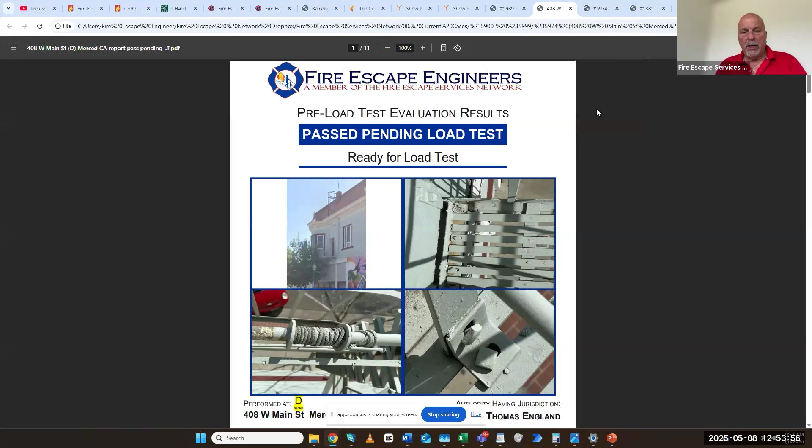So let's talk about, and let's look at a typical inspection report. Let's look at the one we did for you down there. Remember we got there, and we looked at, and this is a report to the client, not to you. You just got a document that said, hey, passed, failed, ready for load test. So the client gets this.

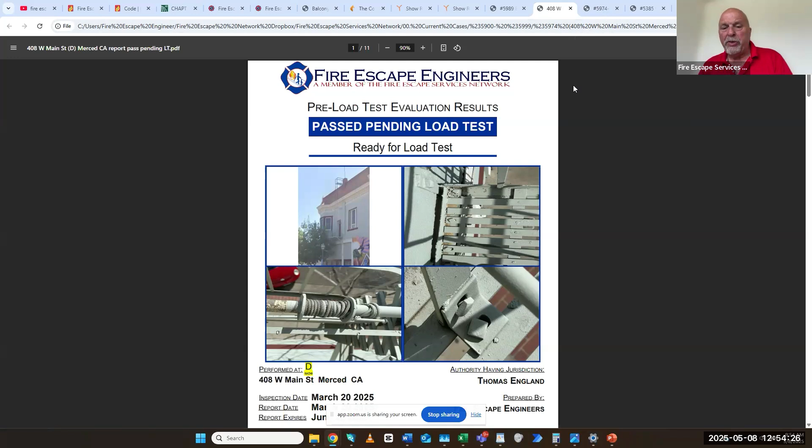This is a second document, you know, that the... it's the, what do you call it? It's not the repair report. This tells you what the problems are, not where they are and how you're going to fix it. Just saying. Okay, so let's talk about, in general, to the client, not to you, what he got to see.

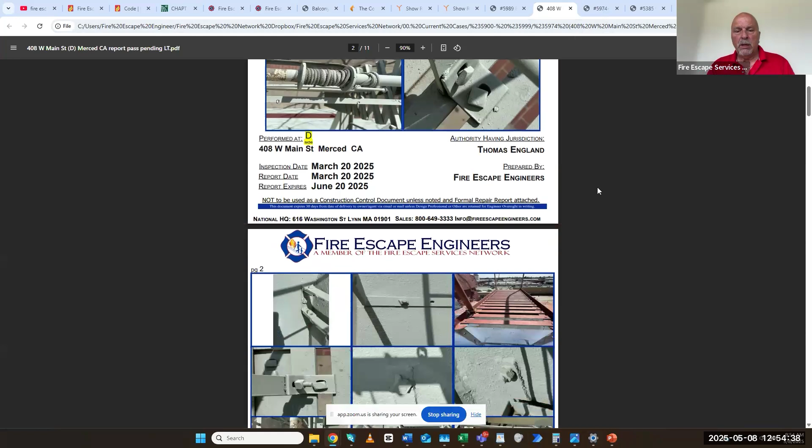So scroll down a little bit more. Some pictures of some of our concerns. You don't get to see this. You don't got time, unless you ask for this, do you understand? If you ask for this, you get this too.

Got it? We have some percentage failures, the paint failed in this percentage, the stringers failed. We have this questionnaire here, so we asked those 25 questions. See them here? Or is this the 15? This is a 15 since this system had residential, right? So residentials get a shorter version because they don't care. They don't want to read 25 steps, they just want to know some of the things.

So we talk about everything here. Paint, we talk about paint. We talk about structural. And then at the end, we talk about code. And a lot of times down at the very bottom, the code thing we talk about is lights are missing, or there's a power line coming to your fire escape and it's not protected.

For short, we tell the client, hey, here's some of the general problems on your fire escape. This is not a repair report. Okay. All right, so then it covers the three things: in general, these things failed, you need to get this looked at, you need to hire us now for the next phase, and that is to create an action plan off of all these reports and videos that we've done.

So, and at the very bottom, here's the only document you're going to get. It's just this document. It says it passed, failed, life safeties are available to you or not. At any time, you can ask for a report. Now, here comes the action plan.

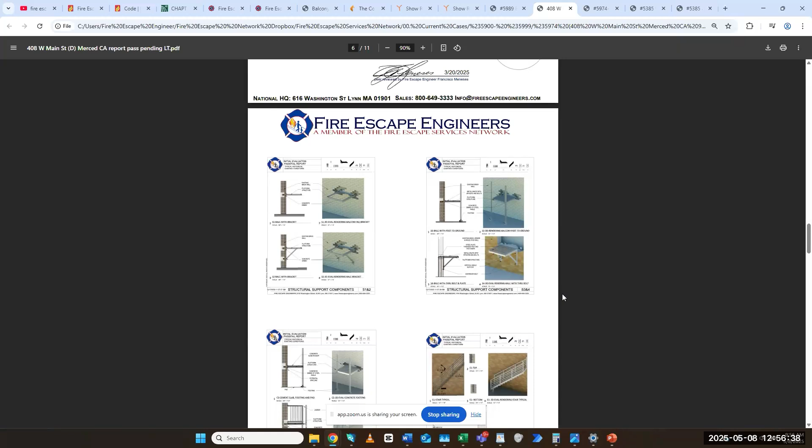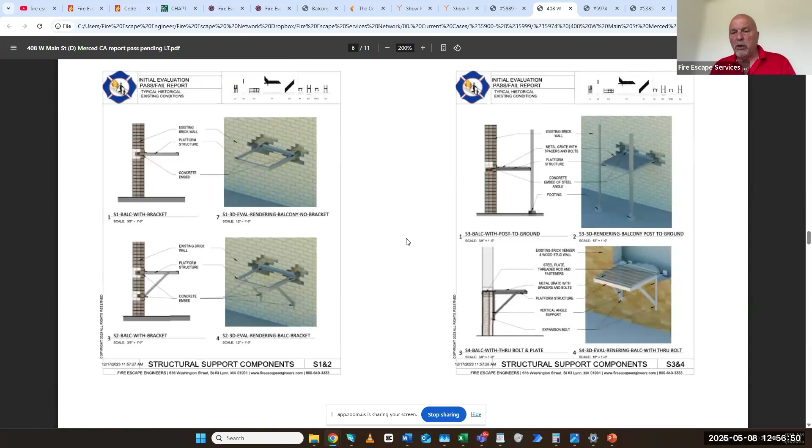But he has questions. Let's scroll down. We would show him these drawings and speak with him on the phone. We would say, this is what it looks like behind the wall with the through bolt or just embedded. This is what legs to the ground looks like. This is your treads, and this is what you do on the stringers. This is what any engineer watching this would understand, right Corey?

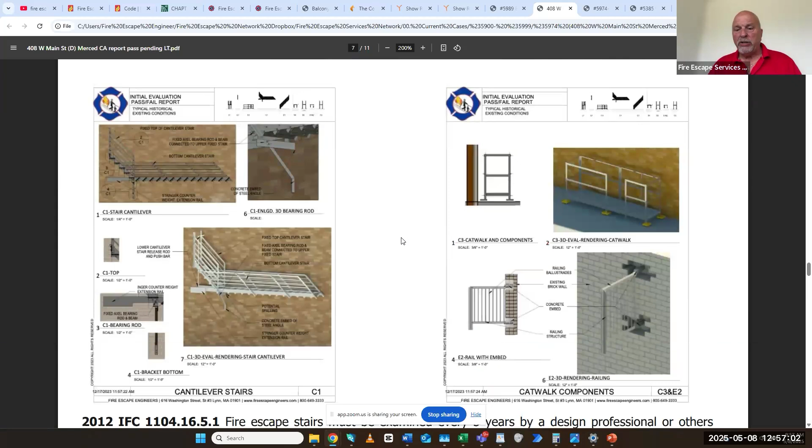So if the client picks somebody else and he did the initial evaluation for $1,000, $2,000, or $3,000, he now needs to get paid to watch a vendor repair this, okay? Fire escape engineers do not repair fire escapes. Fire escape services repairs fire escapes under the watch of fire escape engineers.

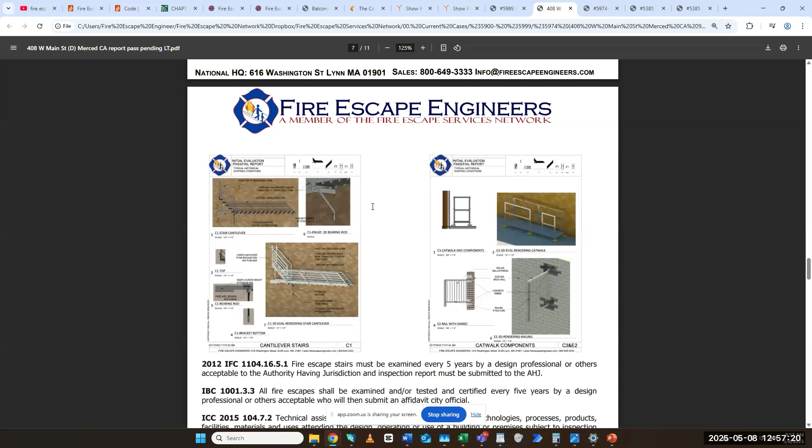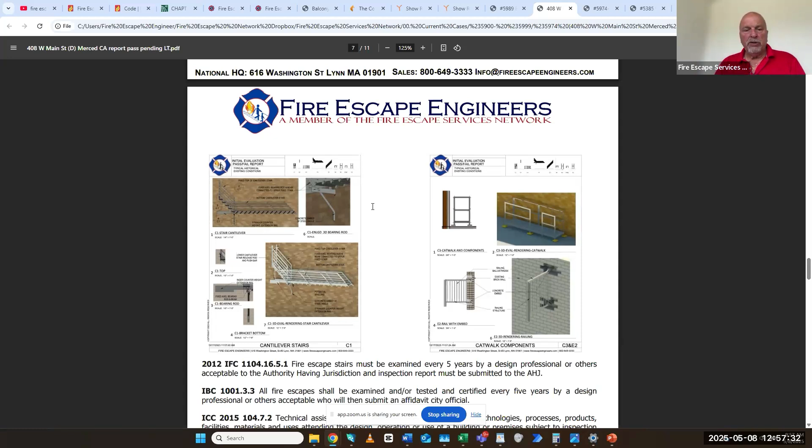You got it? So cantilevers are discussed, missing catwalks on roofs are discussed. We have all these drawings to help in the proposal. So scroll down a little bit more, let's talk about some of these codes.

So you see the NFPA Life Safety Code 101? The authority having jurisdiction shall accept by load test or other evidence of strength. So load testing is not mandatory for every fire escape in your city. If they've changed all the bolts, there is no load test, or it's an integrated load test. Some minor things left behind, we only load test those things.

OSHA requires 1910.37: exit routes must be maintained during construction, repairs, alterations, to provide alternative egress with equivalent level of safety to the AHJ. So if somebody's gutting a 10-story building in your downtown and they have a fire escape on it, they have two choices. They have to certify and load test the existing fire escape during renovation, or they can scaffold the building and mothball the fire escape until it gets done at the end, if that's their choice. But now you and your firemen have an alternative way to get the workers out and get in, using the scaffolding.

There's also a concern here with the EPA lead law. Some of these fire escapes older than 1978 have a base of lead, unless they're galvanized, then there is no base of lead. But they have a top coat of paint on them, that's not lead-based paint. Got it? Okay, let's scroll down some more.

These are the options for clients. What kind of options do you have? The first option is the responsible party part, okay? It says Corey wants to know who's watching this. He doesn't want to know who's repairing it, he wants to know, is there an action plan? He wants to know who's watching the vendor do the job, because if you leave vendors alone, they'll paint the thing and run away, taking all the money.

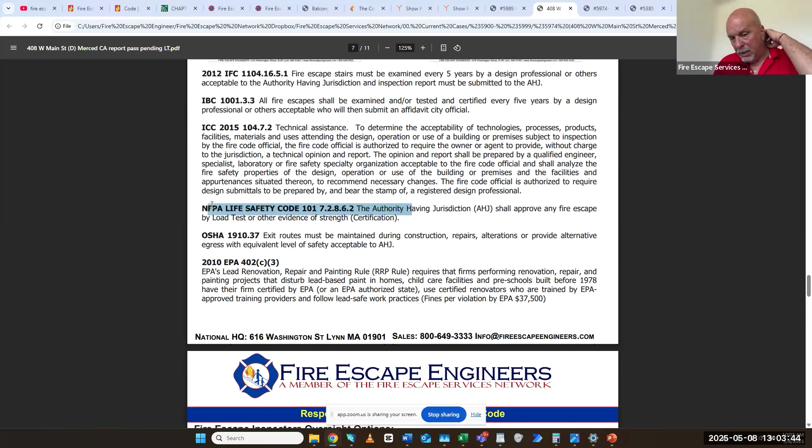It's beneficial for somebody to give you a reason not to load test. You want these people to say, hey, my 75 to 125-year-old building, I changed all the electrical inside, I changed all the plumbing inside, I did all new floors, I did all new this and all new that. And my 75 to 125-year-old fire escape outside, I did the same thing. I changed every bolt, every rivet, and any welds that were there, I backed it up with a backup bolt. That way I am eliminating load testing.

And can it go 25 years and 35 years? Sure it can, if the guys keep it painted - I'm not concerned about the connection anymore. I'm more than satisfied, and I'm willing to put my license and my insurance on the line saying this thing ain't going nowhere. That's why when other evidence of strength is present, you do not load test. So it's in my best interest to... So the load test requirement is more concerned with the original. Correct, right, good way to put it.

All right, next thing, let's give it a number, and let's give it a high number so you can understand. Some of these 5-story, 8-story systems are $100,000 in full restoration, or more. So you're like, oh dude, I don't have the money. I want to do the right thing, this is a legacy building, we're not getting rid of it, we're not selling it, I just don't have $100,000.

So spot restoration and full paint. Okay, so what happens is through our program, nobody else offers this, but we can say: listen, invest into it. So $60,000 now, right?

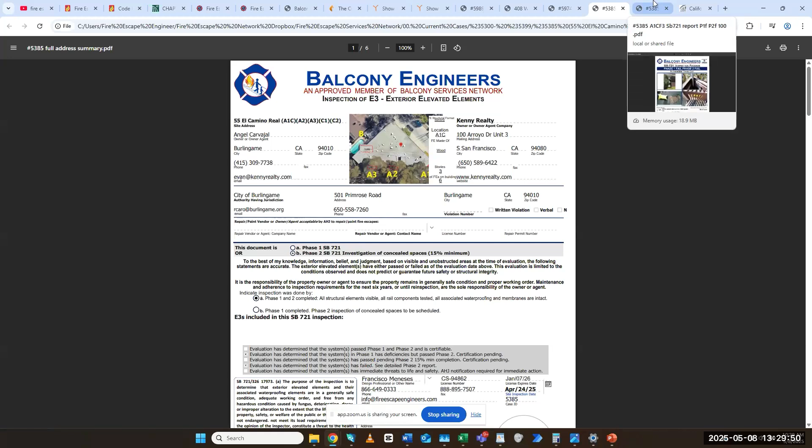So Ben, show me one of our typical reports for a wood inspection or an SB. I have an SB report of a system that fails. We do have the overall, and then the specific phase 2 report with the internal investigation. So you see, leave it on this initial evaluation - very similar to my fire escape one, Korey. You'll get this, and it'll say it's either an SB721 or a 326, right?

And Korey, as you can see, I'm just going to tell you pass or fail - functional or not functional, and that's it. There's no load testing coming. I need 3 things: it must be kept painted, must be structurally sound and functional at this time. No load testing is going to happen on this fire escape, and it's code compliant - there's some code that has lights for the egress. Those are the 3.

The SB721 is a softer version of a fire escape inspection. It's not there to - a lot of people can fix it themselves. You just need to know what needs to be fixed. Is it a loose handrail? Is it a loose tread?

What is it? Can you imagine every egress from now on, going in and out of your buildings, we look at it and just give you a soft report on it? So here's the soft report. It says, here's your fire escape, 4 pictures for now. This goes to the client, not you, because you just want an SB certification. But we tell the client, listen, this is good - we talk structural, we talk paint or membrane. If there's a membrane problem, loose rails, code issue, or others, right? So it's just three things that we talk to these clients about. That's the only 3 things you want to know: is it currently functional and safe?

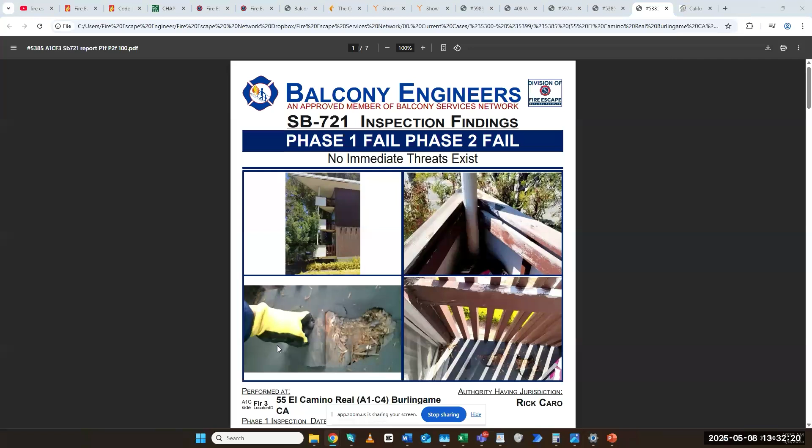The stain, the membrane on top. I think you have a great membrane shot of this job. Is that correct? Look at that. We examined the deck, and all of a sudden we come there, and nobody's telling anybody about this. What's rotting out my decks, and look how high those decks are.

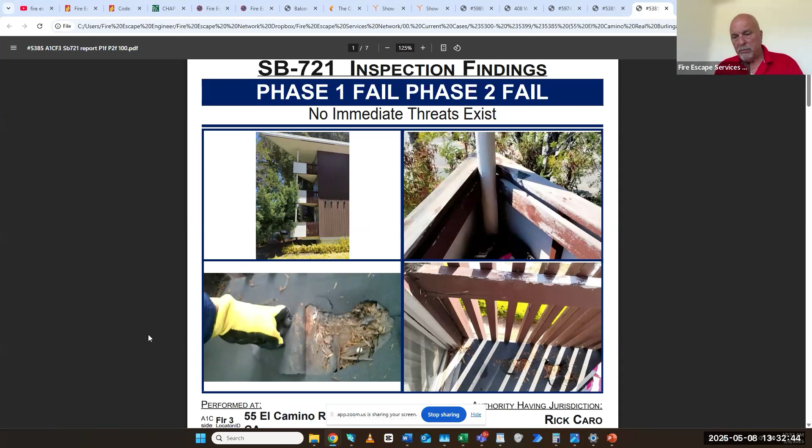So it failed. A lot of times these decks can be routinely maintained, but as soon as we start getting into wood rot, it's structural. Guess what they're going to need? New wood and a paint and a permit.

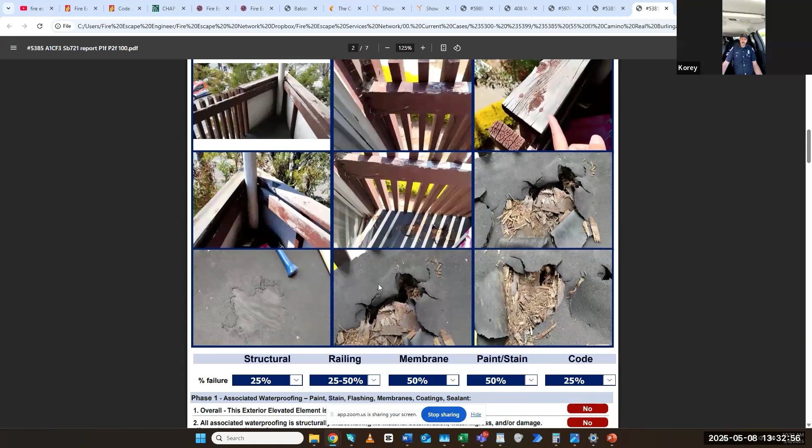See that? Look at all that. Look, separation. So some of this falls into routine maintenance, but some of this is going to have to be opened up, and the carpenter will need a permit to open all this baby up.

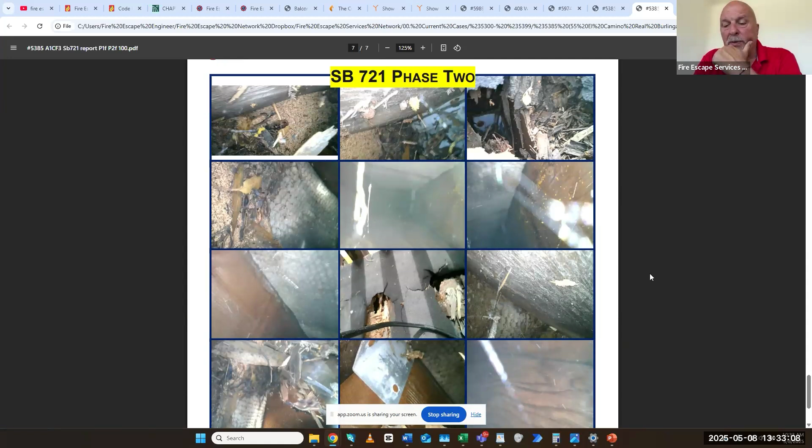Not every company is going to have a great report for you, and you're not supposed to get this report. This is not for you. This is for the client, because from some of these pictures, this is not a construction control document. This is just us telling you what the problems are, not where they are and how many exist.

That's a construction control document that we're going to say, hey, open this up. We need further investigation. The client has to pay more money to bring in somebody accountable and responsible for this, with or without a permit. You know what I'm saying?

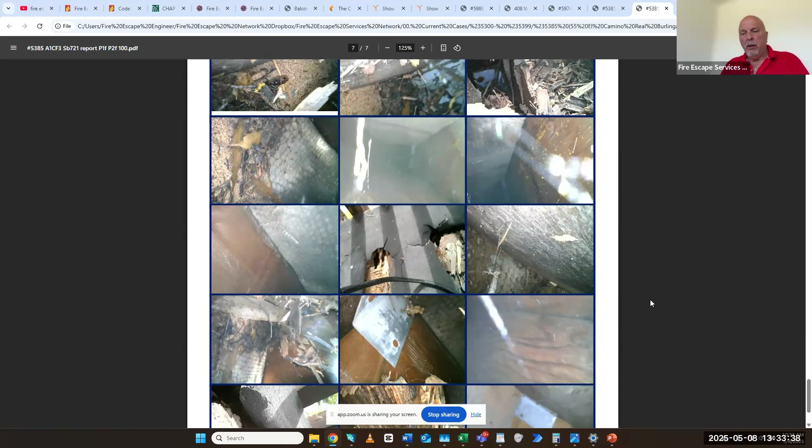The majority of the people just pass. But imagine every deck in your city above 3 families. We're not bothering single family, 1, 2, 3 families, unless there's already a problem there. Then you could order an examination, but otherwise, it's 3 families.

It's all investment property. Imagine all the residentials and all the condos satisfying this requirement over the next 6 years. You got 6 years just to get this rolling and moving. By the 6th year, you're going to be on top of everybody. But right now, you just need to start.

As easy as you ask somebody for their fire escape certification and satisfy Brycer, you say, by the way, I also need your certification on the rest of these balconies, because I don't need to load test the rest of these balconies, which I could if I want to put them in the fire escape side of things. I want you to load test all these balconies because it clearly states that all fire escapes and stairways and balconies need to be examined on the load testing.

You can say, hey, to avoid the stringent load testing requirements on all these balconies, put yourself into the SB. I need a separate report on the SB examination. So get this metal fire escape done for 5 and get this SB done for that, because I need to know that this place that you're renting out, I know you live here, but 2 of the apartments you rent. Let's get this done, because I'm the one that receives this.

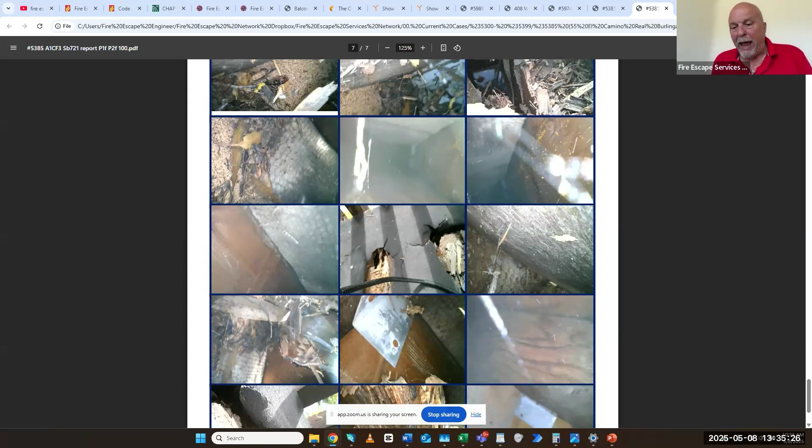This unfunded state mandate is, I want the documentation, and if you want, we can help you get the same document with a 15-point questionnaire, for example, for the SBs with Brycer, and that's just you telling Brycer, please track all my balconies under SB721 or 326.

Okay, so let's. I think we're getting close. I know it's 10:35 right now. Let's open it up to questions and see if you understood everything. I think you see that we have information for everybody.

So write violations, and as soon as they yell at you, you're like, go here. What we wanted to make sure today is that the information is out there. I know you guys can't direct people and say, hey, you must use these people. You're not allowed to do that. But we've also now explained to you that there's people out there that can do it.

If they don't want to do it, these are the guys that teach classes. These are the guys that are doing it. They have the information that tells you what I wrote as a violation, how to get out of the violation.

But if you and Wes are doing theaters, please get all your theater fire escapes under control. You are doing commercial. The place you play with primarily is commercial. Everything's commercial. Just hit everything commercial, including apartment complexes and stuff like that. The residentials will hear the noise, and then on a case-by-case basis, pick on residentials.